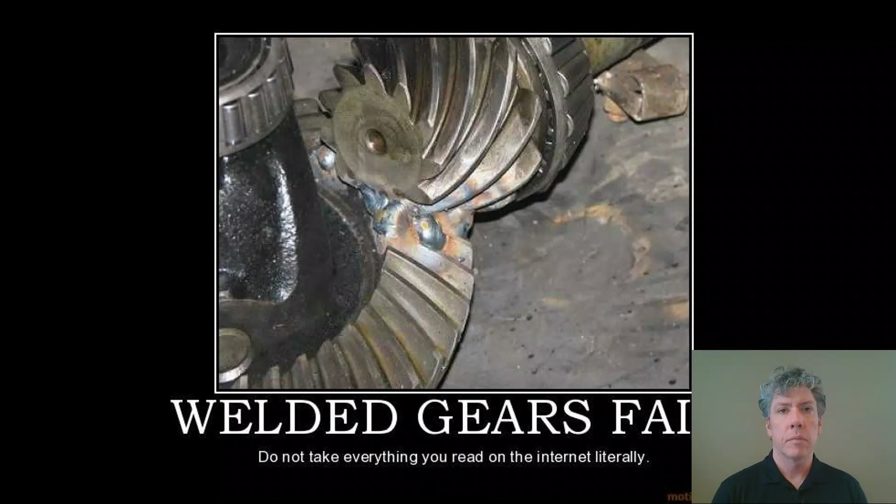We finally get to talk about how you would design a gear set. We'll start with our demotivational poster, which says welded gears fail. You see these gears welded together, one called the pinion and the other the gear. It says do not take everything you read on the internet literally. I guess someone thought it would be a good idea to weld these two gears together, but of course the purpose of gears is to allow for relative motion. I'm sure this was done as a joke, though some stuff I've seen on the internet makes me think it may not have been. Someone may have thought this would actually fix their gear set, but obviously it would not.

So we're going to begin by talking about spur gear design. The gears we just saw were a very special type, different from what we're talking about so far. Those were a hypoid set. But we're talking about just plain, simple gears.

Let's start off with the concept of gear quality. Gears can vary quite a lot in their quality and how good they're made, and there are many different types of imperfections that can be present in a gear.

For example, index variation is the difference between where a particular point on a gear tooth should be and where it really is, at least at the pitch diameter. Tooth alignment, if you think about a spur gear, how straight are the teeth with respect to the gear axis itself? So how square are the gear teeth to the gear face?

Tooth profile is how much the tooth varies from an ideal involute profile. No matter how carefully you make anything, it's going to be imperfect to some extent, so tooth profile variation is just how perfect the gear is versus the shape it's supposed to be.

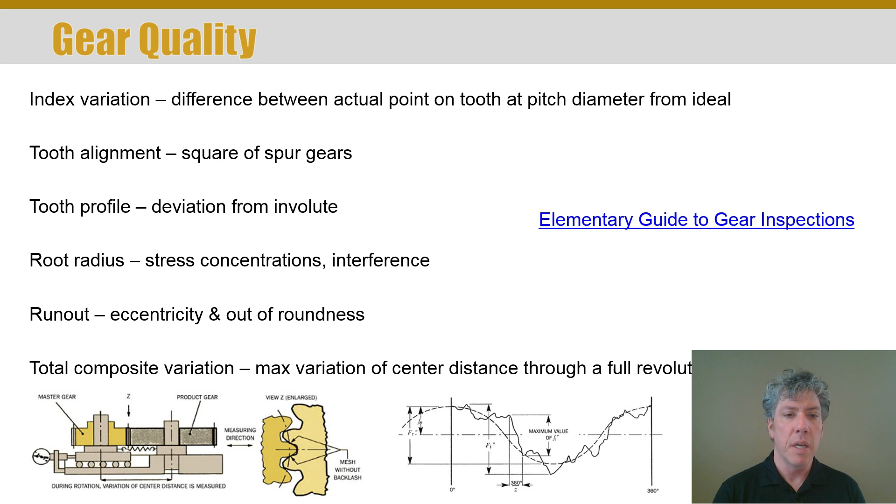So this is the simplest way to measure gear quality, and it really captures all the different imperfections in a gear. Of course you have to have a master gear, a very precise gear, to do this, but that can be manufactured, though they are expensive.

There are various standards for gear quality, and here's a rough correlation between them. AGMA 2000 and AGMA 2015 are the years the American Gear Manufacturers Association released their new standards for gears, so 2015 is the update from 2000, about 15 years later. They changed from a so-called Q system to an A system to be more closely aligned to the ISO standard. The International Standards Organization number for gears is 1328, compared with AGMA 2000 or 2015.

A Q5, which is a low precision gear, is about equivalent to an A11 AGMA 2015, or a number 11 ISO gear, similarly on the high precision side. In the past, as the number went up, the precision of the gear went up. Now it's kind of opposite, backward of what you might think. As the number for the quality of the gear goes up, the actual precision goes down.

There is a DIN standard, which is German, and there are some recommendations on page 330 in your text. Now, as we go through this lecture and the example problems, it is critical that you have your book open and you're tabbing and marking important things.

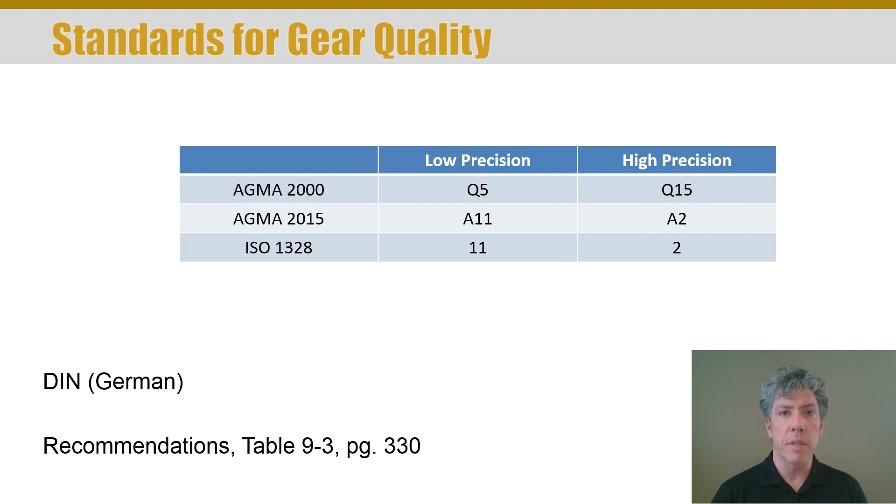I've tried to include as much as I can remember in the slides, but page 330 definitely deserves a tab in your book, or at least a highlight where you know how to find it quickly, because it's the table that tells you what quality of gearing typically would be used in what application. How do you know what quality number you'd use in a cement mixer versus, say, a precise robot motion control system? This table gives you that answer, so make sure you know how to find it.

There are many different materials gears can be made from. Plain carbon steel is probably the most common—it's economical. Cast iron is commonly used for very large or complicated gears. One item not on this list is sintered metal, powdered metal that's been shaped—just like cast iron, you can make fairly complicated shapes because you press the powder into a mold, sinter it, and have a decent gear. Cast iron traditionally has been used for larger or complicated gears because you're pouring the metal and can make complicated shapes.

There are also gears that are heat treated or made of alloy steel, typically used where you need a very small gear and therefore expect very high loads, and also need wear resistance. This is not necessarily a different material as much as a different treatment, although alloy steel is a very different material—but heat treatment can make a big difference in gears' properties as well.

Bronze is commonly used for worm gears, whereas the worm itself is always made of steel. Plastic and aluminum can also be used to make gears, common for relatively inexpensive, lightly loaded gears. When I was a kid, I fixed my mother's garage door opener—it wouldn't raise the door anymore, so I took it apart. Sure enough, there was a plastic gear, a worm gear, and the teeth were literally chewed off from being used so long. It turned out to be a common, easy to find replacement part—I think I paid $15 for the new gear, put it in, and it worked fine. But for light duty, or where you've designed it carefully, plastic or aluminum can be used as a gear.

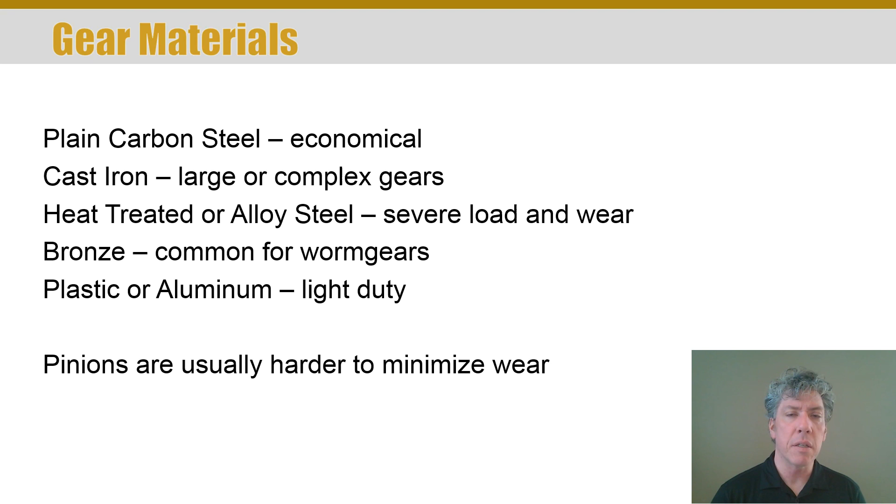Usually when running a gear set together, the pinion is smaller, and so it's usually made harder to minimize wear, because as the pinion rotates, the teeth on it see a lot more cycles and wear than the gear sees, simply because it's turning faster. There are more engagements per rotation of the pinion than on the gear, so it's common to make the pinion the beefier or stronger material.

The more common way gears fail, if designed correctly—or almost correctly—is by contact stress, so fatigue. When two gear teeth mesh together, there are high forces between those teeth, surface forces transmitted between two surfaces. The theoretical contact in spur gears is a line, which is zero area, so theoretically you have infinite stress. That means the surface of the gear tooth will deform some, and as it deforms, to have a non-zero area so the stress is non-infinite, you still end up with very high stresses. Once that tooth goes out of mesh, the stress is completely relieved, but when it comes back around, it's reapplied, and so on—now we're in the world of fatigue failure.

Contact stress, or surface pitting, is a very common problem for gear teeth, and you have to design against that as well. In fact, a lot of times you'll start off your design by designing against bending stress and come up with a gear design that should work, then you go through the contact stress calculations and find that you're not even close. You need a much beefier gear. But we'll see all that more in the context of example problems than lectures. There's a lot to it, a lot of tables, figures, and information you need, so make sure as you're watching the example problems you've got your book open, your highlighter, and your tabs handy, because you will definitely want to make some notes in your book.

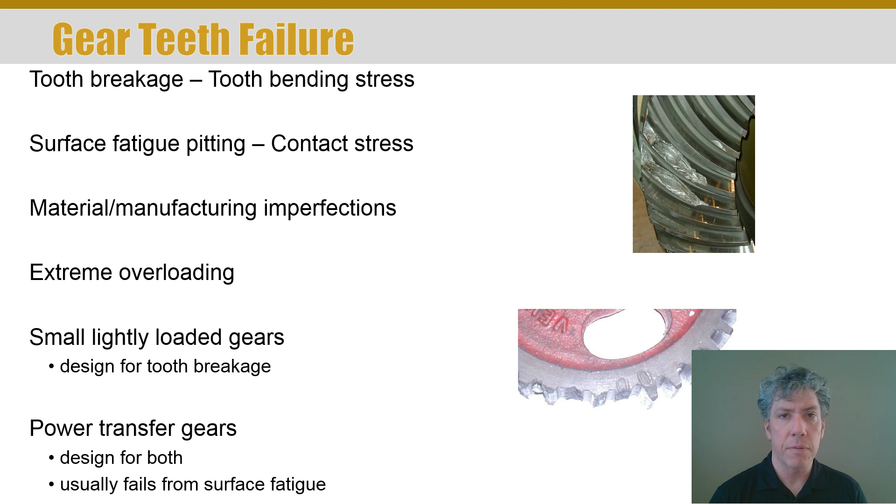So I'm sure the lifetime of that design was simply exceeded. Now, some of the objectives you have when designing a gear set are that the set be compact, that it be quiet and operate smoothly. You want whatever life the equipment is supposed to last, that it would last for that life - not necessarily a super long life. Like I said, that garage door opener was probably designed to last 5 years, and I think she probably got 20 years out of it by the time it was all said and done. It needs to have a reasonable cost, it needs to be economical, and of course, what is low cost depends on the application.

If you're talking about a cement mixer, the gears don't have to be all that precise. You expect there's going to be cement dust and all kinds of junk getting in between the teeth, so you expect to not make very precise gears, and expect them to be relatively low cost. Now, if you need extremely high precision gearing, for, say, moving a telescope in space to view space, and you need very small, precise movements, you can expect a precision gear like that to cost a lot more. They need to be relatively easy to manufacture and, of course, compatible with shafts and bearings and all the other machine elements in a machine.

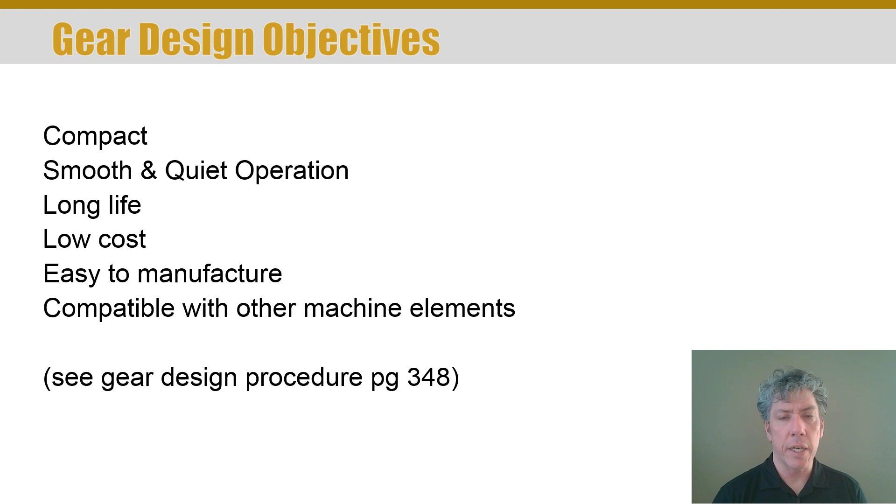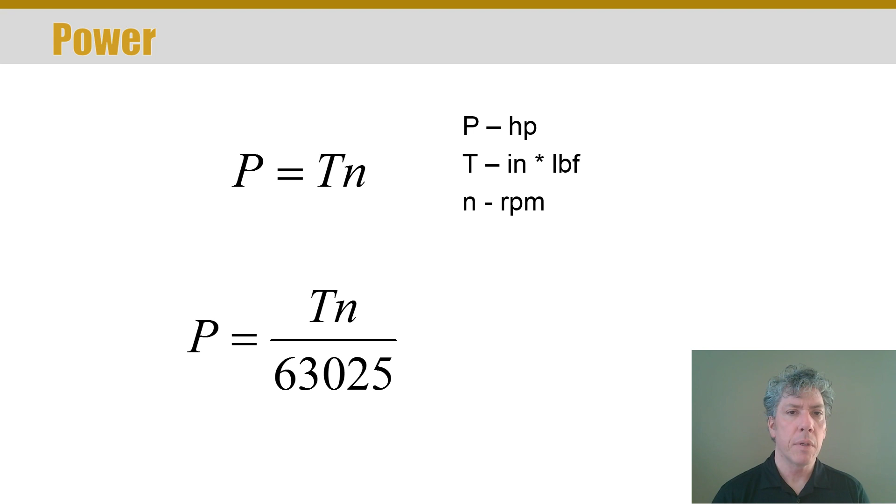Now, there is a gear design procedure you will want to mark. It's on page 348, and I will refer to it as I go through example problems. The power-torque-speed equation will come into play again, because the goal of gears is to transmit power. Most of the time we don't design a gear set for, say, opening a door or raising a load. Most of the time the purpose of a gear set is to transmit power from a prime mover to some machine. While you could argue that the door in my example would be the machine, a door that's raised and lowered just doesn't see that many cycles, so that's not really what we're talking about when we're talking about power transfer. Think more gearing in a drive system like in your car, for a consumer example.

The force on the gear teeth is what will certainly cause failure in the teeth, so we have to somehow calculate it. The piece that we really want is the tangential load. The tangential load is the horizontal component, you can see it there in the figure, that actually causes a moment, a torque, about the gear and causes the gear to rotate, transmitting power. That's the particular load we're interested in.

Of course, it's related to the torque on the gear through the radius of the gear, or the diameter over 2. You can see the first two equations are the same thing, just rearranged. They're in your text as well. You may want to highlight them. We'll use them over and over.

The radial load is a side effect of the fact that we have to use teeth that are involute shaped. It's a trade-off, something we have to give up. We wish we didn't have the radial load, because what it does is take the two gears, the gear and the pinion, and push the teeth apart from one another, trying to push them out of mesh. The higher the tangential load, the higher the radial load, and the more the teeth tend to be pushed apart.

Now you might wonder, how do we get this radial and tangential load? Remember, we're going to put oil on the gear teeth so that there can be no force tangent to the face. All the force has to be normal to the face. So the actual load between the teeth is the normal load, W sub n.

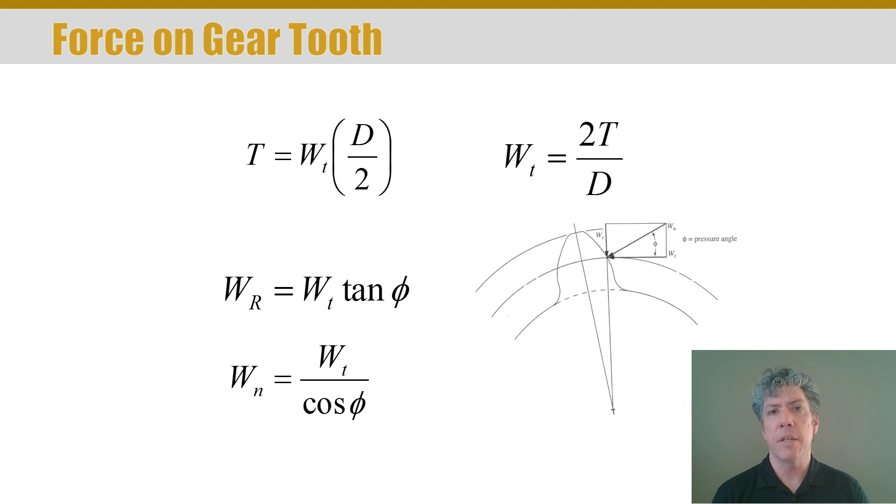Now, you notice we're calculating the normal load from the tangential load based on the pressure angle. This is intentional. Even though the normal load is the actual load applied, the load we're interested in is the tangential load. So everything is based on the tangential load.

So finally, if that's the loading on the gear teeth, how would we analyze the stress in the spur gear teeth? Well, there's the so-called Lewis equation, and I'm sorry it's a little small on the screen. I guess I need to increase the size of that equation. It's in your text as well. But basically, all this does is begin by treating the tooth as a cantilevered beam.

Now, there's a little more to it than that because it's not a typical cantilevered beam, and so you might see the stress listed there as a normal stress, and that's expected because in a beam, what causes failure is the normal stress due to the moment, right? So the bending stress. You see the tangential load, which makes sense, and then the diametral pitch, which has to do with the size of the gear tooth, the face width — obviously the wider the beam, the more load it can take.

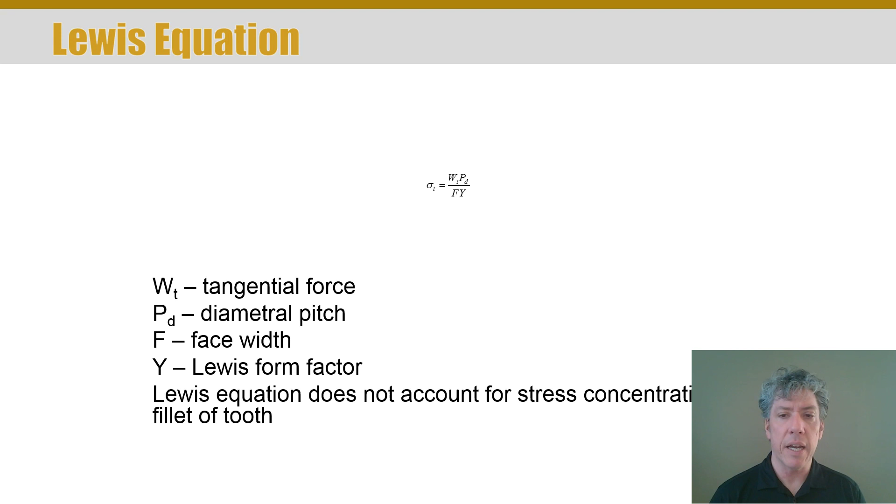And then what's called the Lewis form factor. The Lewis form factor takes into account the fact that the beam is not the typical beam you would deal with. It also takes care of the diametral pitch to make this equation true. Now, one thing about this equation, it does not take into account the stress concentration at the fillet or the root of the tooth. Now, if we were to include stress concentration with a stress concentration factor K sub t, then you'll notice K sub t and y would just be functions of the geometry of the gear.

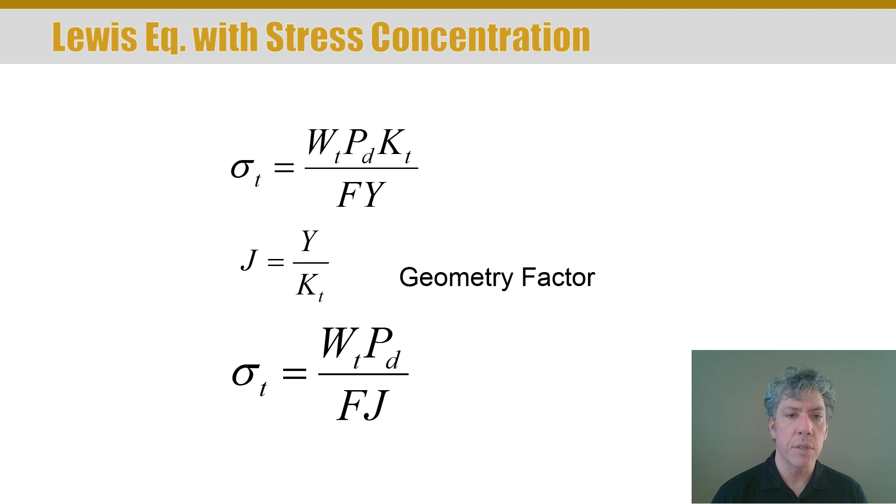So we could put those two together and call it a geometry factor J. And here's the Lewis equation updated with a geometry factor J. However, there's so many other factors that affect the life of a gear and the strength of the gear and so forth that the Lewis equation is actually not used.

What's used instead is something called the bending stress number, S sub t. So you notice we've dropped the sigma, which would strictly indicate a stress, and now we're using S. Now it's called a bending stress number because it doesn't necessarily estimate the actual stress in the gear tooth, but it's the effective stress due to everything else.

So you'll notice the first ratio there, that first fraction, Wt P sub d over F J, is just the Lewis equation. But the rest of these factors more closely incorporate other things that can cause damage to the gear teeth, and we'll go through each of these. You notice there are 5 K factors, and we'll go through each one.

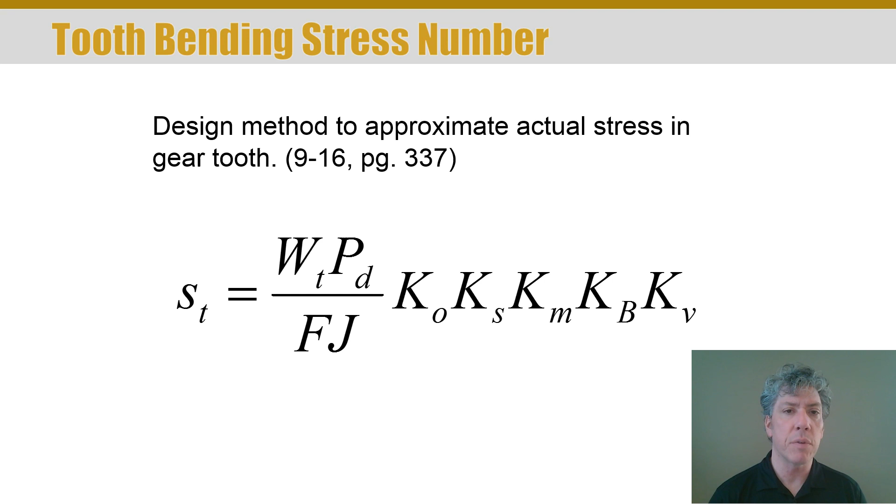K sub O, and again I'm sorry this is small, K sub O is called the overload factor, and basically this takes into account any vibration, shock loading, load variations that can happen. If you think about it, when you put your car in gear, if you have a manual and you step on the gas, that's a lot more load on the transmission and the gears in the transmission than when you're just cruising down the road.

What if you try to spin your tires, hit the gas, pop the clutch, and get your tires to break and spin? That's going to be a very high shock load. Those sorts of things are what are taken into account with the overload factor.

Of course, in industry, you're not popping the clutch. Instead, what we're talking about are things like engines that have higher torque spikes as the pistons come around, or machines like rock crushers that can choke, or that have very high sudden impact variations in loading.

The size factor, K sub s, is on page 337. You should be on that page now, and you'll want to mark this page as well in your book, because you will reference these factors all the time. The size factor has to do with the size of the teeth.

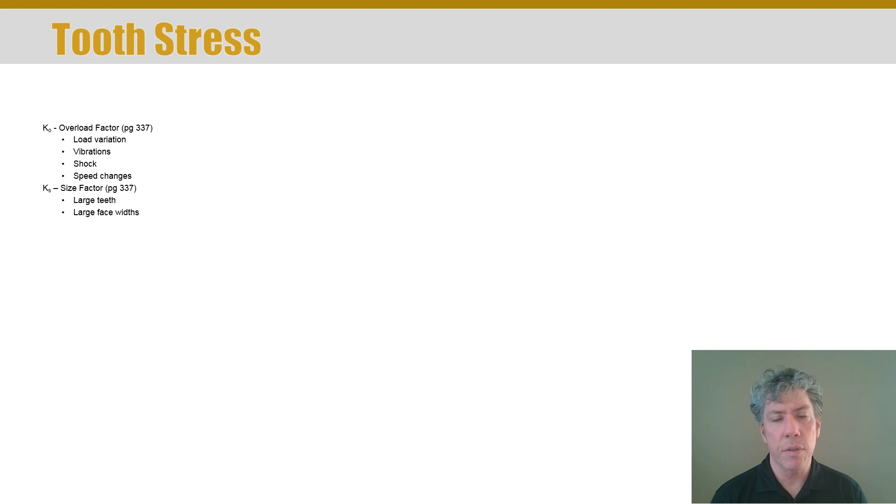If you have a larger face width, the size factor comes into play, because because of manufacturing variations, it's less likely with a larger face width of the teeth that the full face will be used equally. In other words, the face is going to be imperfect, and those imperfections mean there will be hills and valleys, where the hills are making contact and the valleys aren't. So there's going to be higher stress in the teeth due to imperfections, and the larger the tooth, the more likely there are to be more and larger imperfections.

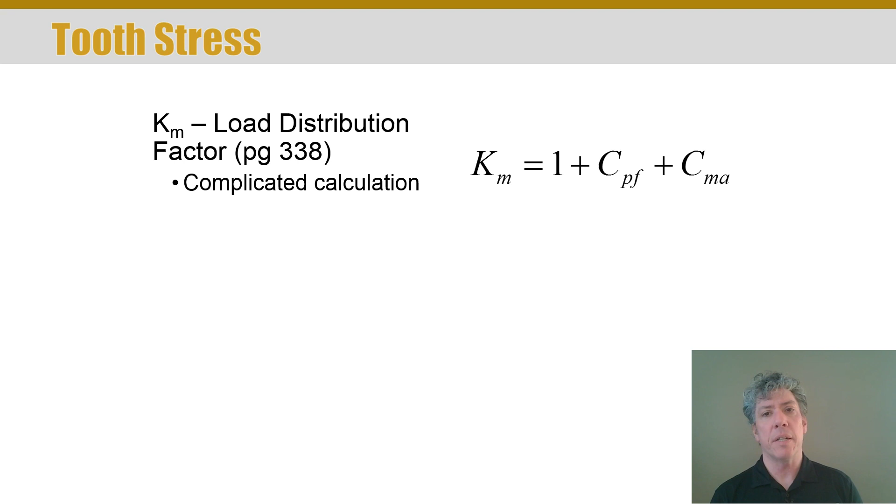Km is called the load distribution factor. It's on page 338. In the standard, the AGMA standard, it's actually a very complicated calculation. We're going to simplify it just to simulate it for the sake of our course.

It consists of a pinion proportion factor and a mesh alignment factor. I hope I got those two right. I always confuse those two, but you'll see me use them in the context of example problems, and you'll see me confuse the wording, so I hope that doesn't confuse you too much. But I'll explain more about those two and how to use them in the context of example problems.

The rim factor is another factor that's important, and if you think about a large gear, you probably don't want to make it with a solid hub going all the way out to the rim itself. You'd probably want to use spokes. But if you use spokes, then you're going to have a fairly thin rim that the teeth ride upon.

As the teeth go into mesh with other teeth, the forces are going to cause deflections of those teeth, and can possibly cause deflection of the rim itself. If the rim moves, that's going to affect the tooth stress, and that's what this rim factor takes into account. You'll notice that after a certain ratio between rim thickness and tooth depth, the factor is just 1 -- the rim is pretty much rigid and has no effect. I think that's about 120% of the tooth height. So once the rim is thicker than 120% of the tooth height, you pretty much neglect the rim.

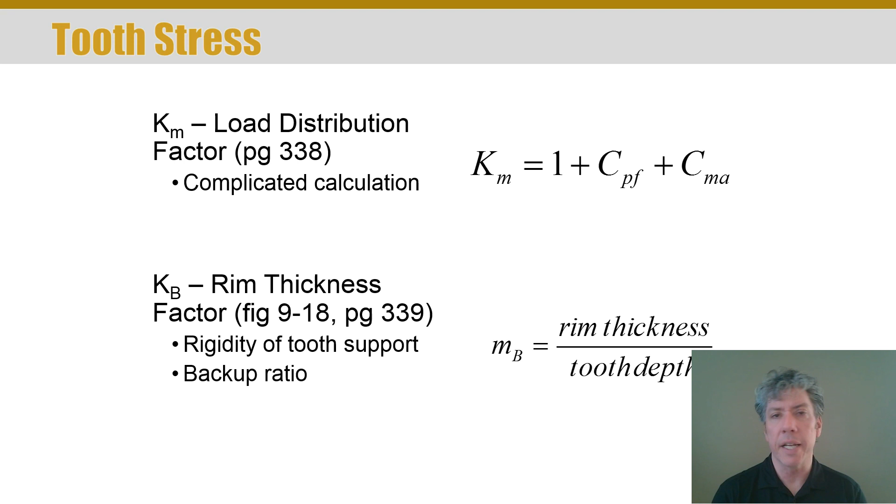KV is the dynamic factor, and it's the effects of impact. If you think about the teeth as they come around and come into mesh, there's some clanking that's going to occur. The gears are not perfect, and so the teeth are not perfect, so there's not necessarily going to be a perfectly smooth transition of engagement from one tooth to the next.

That dynamic factor has a lot to do with the quality of the gears and the speed at which they're run. Which is easier, to take a hammer and a nail and tap the nail in, or just whack the nail? If you whack the nail, it moves in a lot faster -- there's a lot more effect there. So if the gears are moving at much higher velocity, there's going to be much more effect, just like a hammer hitting a nail faster.

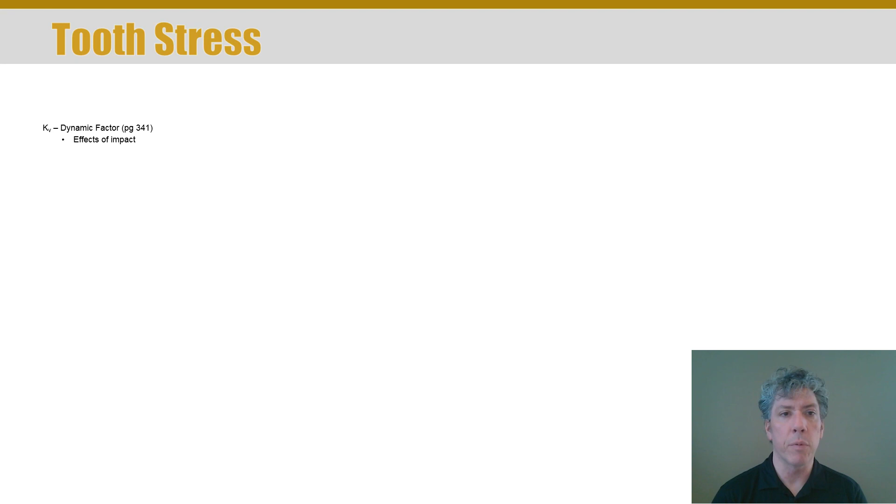So the effects of impact and the quality are taken into account here. Again, this is a page you'll want to mark in your book -- page 341 if you can't read the slide. I apologize for the size again, I thought I had all this fixed. I'll try to fix it and upload the slides for you before you see this video.

Anyway, SAT, on the other hand, is the allowable tooth stress. Now be careful: the bending stress number, S sub t, is our estimate for the effective stress in the teeth -- not really the stress itself, but the effect of all the other factors on the stress.

And it's kind of like overrating the stress due to all of the velocity factors, the overloading, and so forth, that are extra abuse to the teeth, even though the teeth aren't really stressed at a higher level. That's focusing on the load side of the equation.

On the other side, what we want to compare to is the material strength. This is called allowable strength of the material. Now, we can't just compare this to, say, the yield strength of the material we make the gear from, or the ultimate strength. It's a little more complicated than that. Notice that the numbers we're going to use are typically for temperatures less than 250 degrees, 10 million cycles, and 99% reliability with a safety factor of 1.

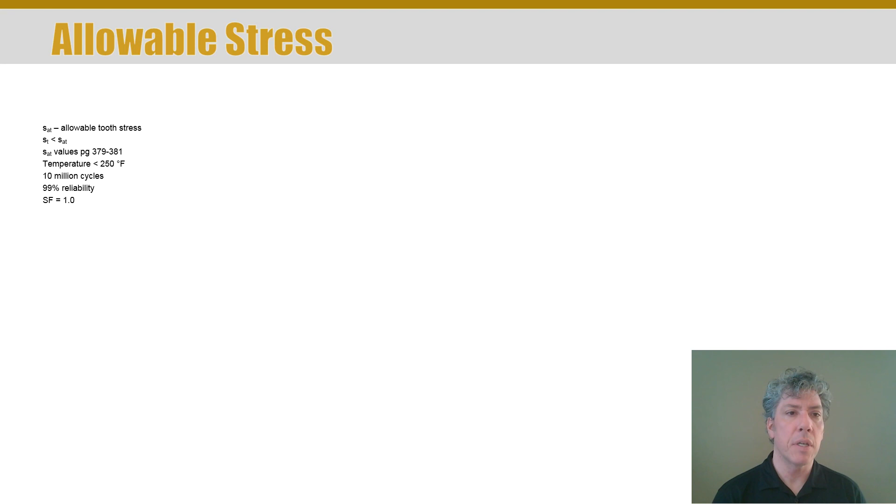Now, S sub T prime takes some other things into account. So, for example, if you think about the number of cycles that a gear has to undergo, well, that's going to be a fatigue type load. Notice we didn't put fatiguing on the load side, we're putting it on the material side. That's what Y sub N stands for. It's a fatigue type factor. SF is a safety factor, and KR is a reliability factor.

What if 99% reliability is not good enough? Well, then we have to adjust it. And so S sub T prime is called the adjusted allowable tooth stress. So what you do is you would calculate the bending stress number, S sub T, come up with, if you choose a material, the adjusted allowable tooth stress, and compare the two together. And if the bending stress number is less than the adjusted allowable tooth stress, then things are fine.

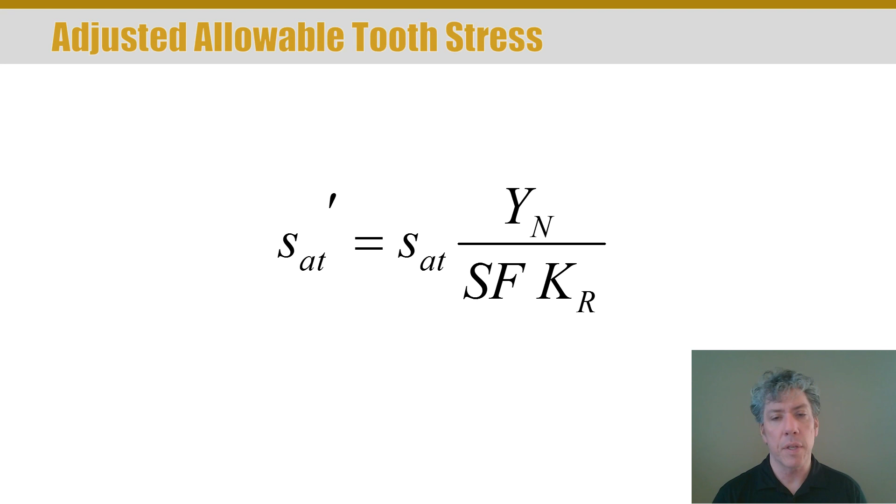Now, to come up with the stress cycle factor, or what basically takes into account fatigue loading, we have to first of all calculate the number of cycles that we expect for a gear tooth to undergo. And so L in this equation is the design life in hours.

So, for example, a car is not made to last all that long. You may want to look up in your book and see the recommended design life for an automobile. You may be surprised because you know that you can probably buy a car, and if it's a decent car, it'll last you 20, 30 years if you really take care of it, right? So you might be surprised to see that cars are only made to last in the thousands of hours. And you might say, well, that doesn't make sense. There's a lot more than 1,000 hours in a year.

Yes, but you don't drive your car most of the year. This is why taxis actually look so bedraggled after a short period of time, because they're not designed typically to last for as much time as they're being driven. When a taxi is being driven 16 hours a day, its life goes away very quickly because it's simply not designed to last that long. This might give you an idea as to why selling your car essentially to Uber and whatever the other ride services may not be the best idea. But that's up to you. That's a calculation up to you.

So anyway, the number of cycles then that a gear tooth will see is given here. The 60 is just a conversion factor. L is the life in hours. N is the speed of rotation, just assuming a constant speed. And Q is the number of loads.

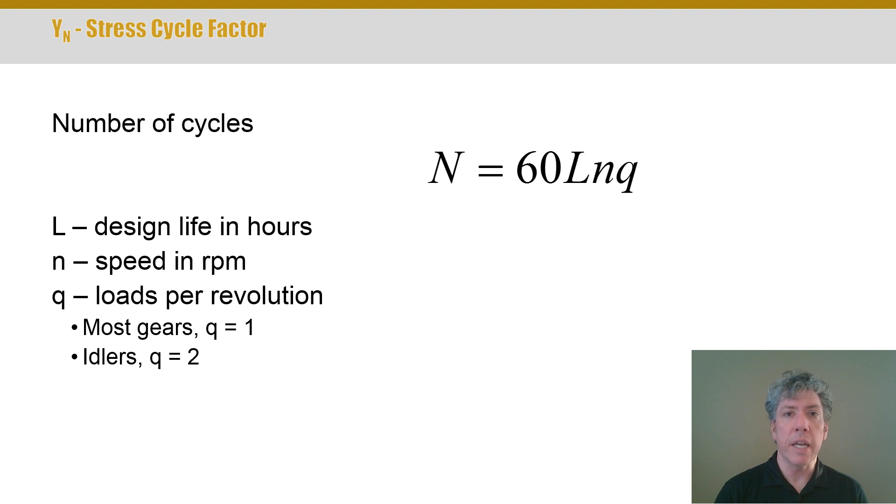And so the tooth sees two loading cycles per revolution rather than one. And so Q is a type of gear factor, and if it's an idler, then it's set to 2. If you think about it, if you had 3 gears around a single gear like you would in a sun gear, then you've got 3 loadings, and Q would actually be 3 loads per rotation.

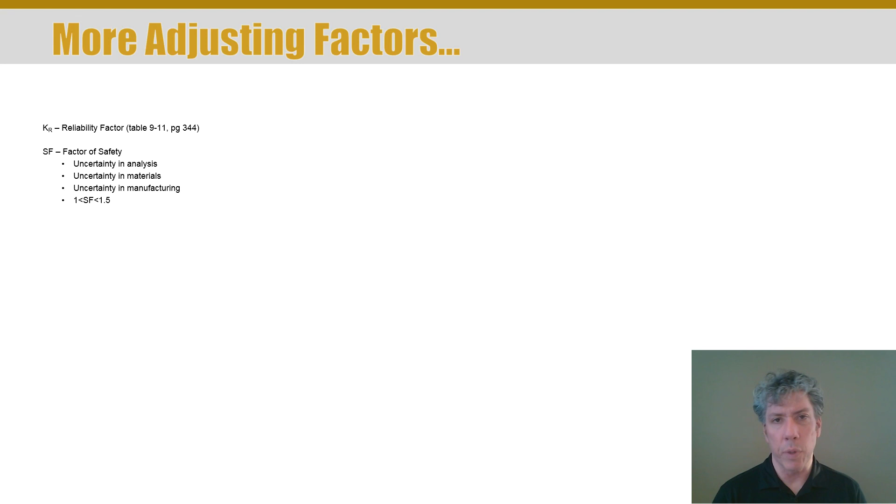The reliability factor, there's a table 9-11 on page 344, another page you need to mark, and then the safety factor is just there for any other uncertainties you might have in analysis. Now notice we've tried to be pretty careful here on the material side and the load side, and so usually you don't see a safety factor for gearing that's 10. Usually the safety factor is between 1 and 1.5, because we take so many things into account.